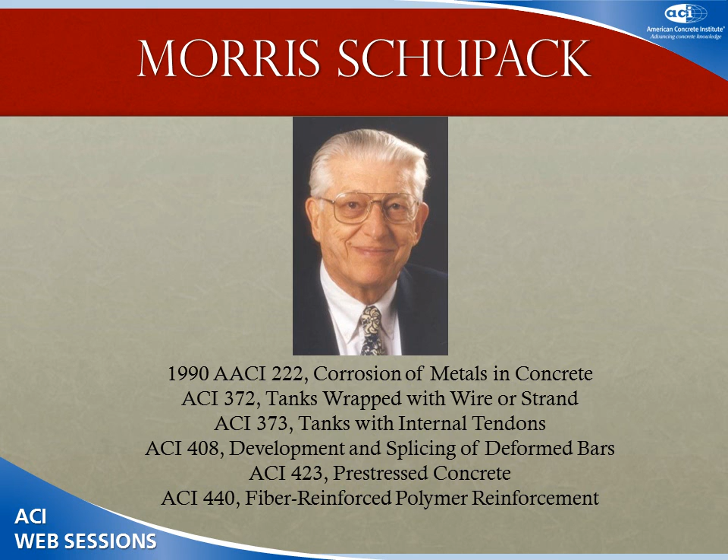Maury would only give me pictures of grout, and tanks and things. So I don't have any wonderful young pictures of Maury or family pictures of Maury, because when I asked for pictures, I kept getting more grout pictures. So I finally gave up.

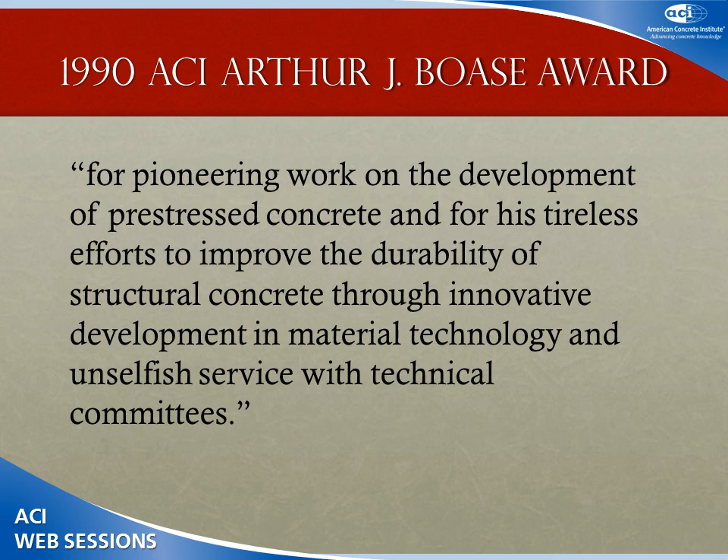Maury was also the 1990 recipient of the ACI Arthur J. Boase Award for his pioneering work on the development of prestressed concrete and tireless efforts to improve durability of structural concrete through innovative development in materials technology and unselfish service with technical committees. I would guess we're well into the thousands of hours that he's put into ACI with his contributions on the committees. Maury is not an academic. He is a consulting structural engineer and had a very interesting background.

At the age of 15, living in Brooklyn, he took a course in structural engineering at the Polytech, and he still says today that this was the best educational experience he ever had, was this course at 15. That combined all the theory and mechanics and structural design along with hands-on time in their steel fabrication lab. And then to test out his ingenuity, he went around the neighborhood and repaired all of the steel cellar doors for his neighbors using leftover bed frames and things like that, and then taking them to the fabrication lab to finish up. So a very ingenious engineer from the very beginning.

In 1939, he started college at Brooklyn Polytech and then moved to George Washington University in 1940. At that time, he was also working as a civilian draftsman for the Corps of Engineers. And in 1941, as a GI, he was selected for a year of civil engineering specialist training at The Ohio State University. After that year, he was sent to France as a construction specialist, and those quotes are his. He said, "I'm not sure what a construction specialist is, but they told me I was going to France with a 50-man detachment and would be constructing 3,000-bed hospital laundries."

This one he also said tongue-in-cheek that he was made staff sergeant. One day they called him in and said, "Due to your superior technical savvy, we are promoting you to staff sergeant." He says he wasn't sure what that superior technical savvy was, but he was happy to be promoted.

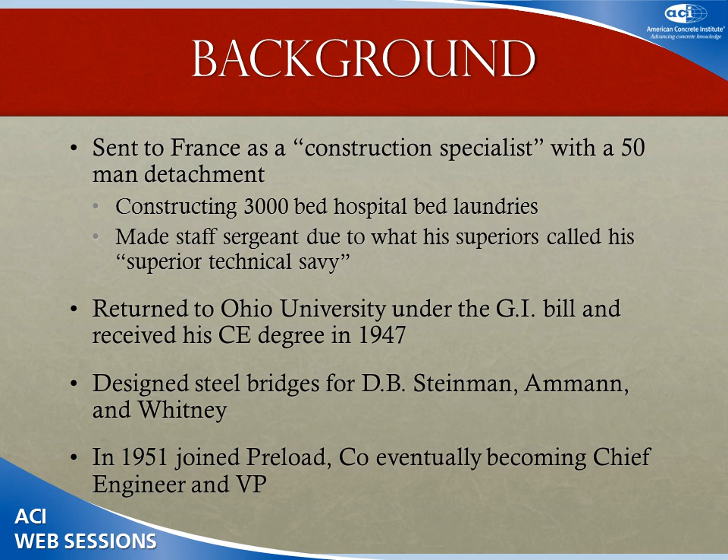And he sent me 2 huge boxes full of all the files of every patent that they were looking at in those days. And it was completely fascinating. It was like sitting in the library stacks going through some of the craziest things I've ever seen for potential post-tension anchorages, but also at the development of what we have today. And then the correspondence between the couple companies that were working in this area from the day. So it was a neat historical record, and he was really part of this whole development, particularly in the post-tension industry.

He started his own consulting practice in the late 50s and specialized in pre-stressed concrete structures, and since then, that's basically been his focus for different types of companies. He's investigated over 200 pre-stressed steel corrosion incidents is what he calls them, but typically problems, about half of which were the pre-stressed tanks, and about 40% was unbonded post-tensioning problems, with the other 10% being other things.

He's a past board member not only of the American Concrete Institute, but also of the Precast Pre-Stressed Concrete Institute and the Post-Tension Institute. ACI first, the PCI and PTI developed from there. So he's been active in all those. I know him very well also from the PTI committees. He's extremely active on the Grouting committee there, and with tanks, of course. He's got over 70 articles and numerous reports.

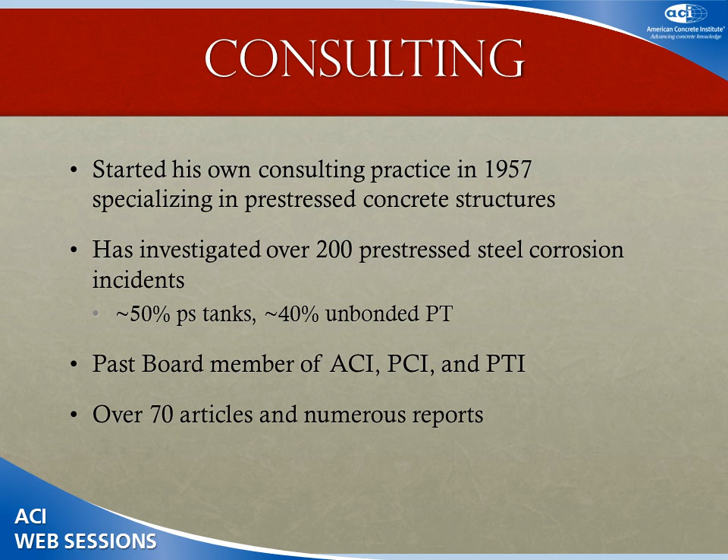I met him as a graduate student, and I'll have a story about that towards the end. But once I met Maury, he's got an article for anything you can imagine. If I needed something on some aspect of grout, he's got it in his files. It may have been published in something that I haven't heard of, but he's got it, and he's got all the details, and had already investigated a lot of the things that I thought were new.

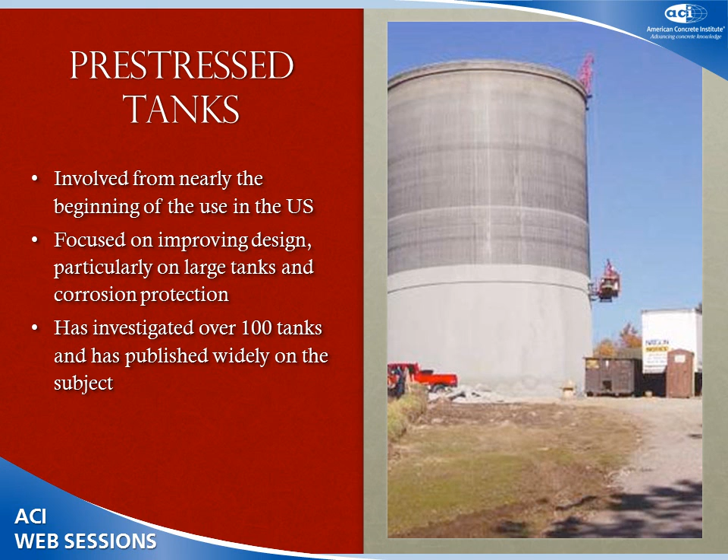So one of his areas is pre-stressed tanks, and this is another case where he was involved nearly from the beginning. So some of the early pre-stressing in the United States was the pre-stressed tanks. And his focus was on improving the designs, particularly with the very, very large tanks, and also looking at the corrosion protection, knowing the importance of that in this type of structure. He's investigated over 100 tanks and published very widely in this subject.

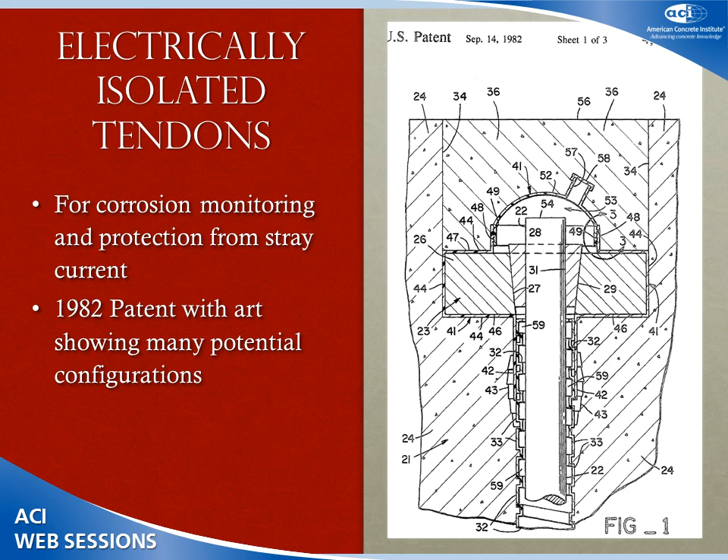He has quite a few patents, both in grouting and also there's some in tanks. If you look up his name in the patent office, there's quite a few in there. One of the ones he talks about is in the electrically isolated tendons for corrosion monitoring and protection from stray current. So this is a way to electrically isolate the whole anchorage and strand system. And this is his 1982 patent. And in that patent, if you look it up, there are many, many different configurations of this, most of which look very much like what you'd see today in an electrically isolated tendon.

Post-tensioning grout. This is the part I know most about Maury, as one of the other couple people who work in the post-tensioning grout area. He recognized the bleed problem that we still wrestle with in post-tensioning grout back in the early 60s. He was working with a lot of the taller nuclear structures at the time and started seeing the water collect and started studying what was actually going on there.

So I don't have my grout primer here, but essentially what you get in a post-tensioning tendon is a pressure head develops in the grout, and that squeezes water to the top. And if you have strand particularly, it filters the water and helps you collect a large bleed lens, which then can reabsorb or evaporate or stay there, but leaves that piece of strand or bar tendon vulnerable to corrosion and other problems. So the higher the pressure head and the more strand, the more you see this.

And if you look at these types of structures that he was looking at, 150 feet, 180 feet, these are huge, huge vertical rises that cause a lot of pressure and very large strand tendons in many cases. So he started doing these mock-ups in the 60s at full height. They would attach them to the outside of the tank with some clear duct and take a look at what happens, and found that there were feet and feet of water that were developing at different points along these tendons.

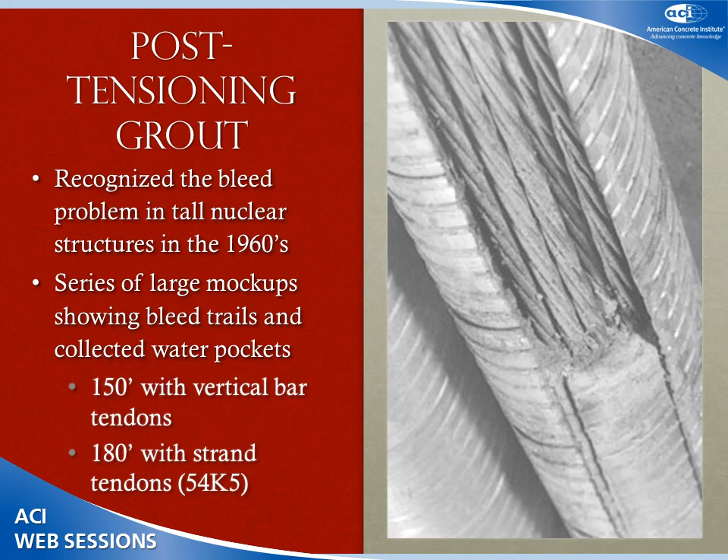So eventually we decided to name this test in honor of Maury, and so it became the Schupack test in the PTI specifications. It has since become recently an ASTM specification for pressure testing, filter pressure testing. It's a very interesting way of handling both the filtering and the pressure test, and my personal belief is to this day this is the best bench scale test we have for looking at this.

Okay, we have some other types of mock-ups and things to try to get the real scenario, but it's not easy to build those large mock-ups, especially if you're looking at a case of 180 feet with a 54-strand tendon. So I still think that this is a really effective test for trying to get a feel for if a grout has that type of bleed resistance.

He did this test in conjunction with trying to develop a grout that would withstand this type of pressure and filtering. And so during that time, he developed the first thixotropic or water-retentive grout admixture that stopped the bleeding in grouts. And this early admixture was very effective. And this would be hard to do with grouts today. It was a much thicker grout than what we see today, much more gel-like, but they still were able to pump it in hot conditions. And this grout could successfully pass that 180-foot high test with no bleed visible in a clear duct. That's not a small feat.

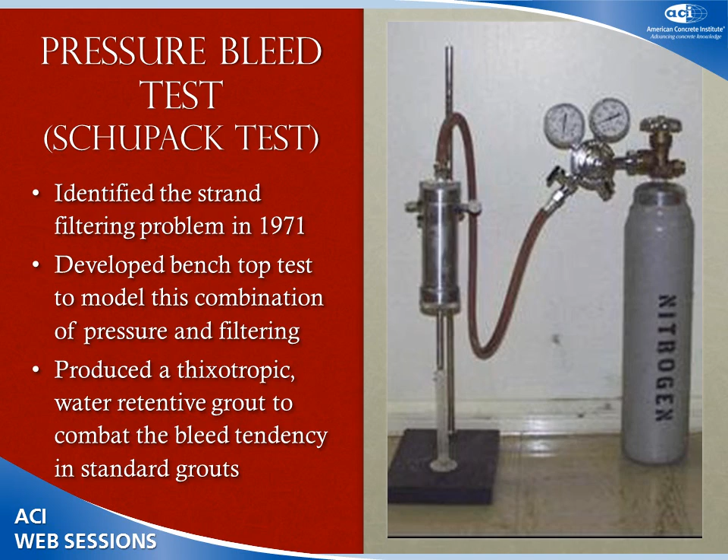This is what the test is. You fill up this little small 200 milliliter stainless steel funnel with grout, and you have pressurized air, and you push the water out of the grout. In the bottom is a small stainless steel screen and then a fiberglass filter that's supposed to mimic the filtering effects of the strands. Now, it's not the perfect scenario, but it's pretty darn good compared to a 180-foot tall tendon versus a very small benchtop setup, and is effectively used particularly to screen out the low-end grouts that are not going to be applicable for kind of 10-foot rises and below.

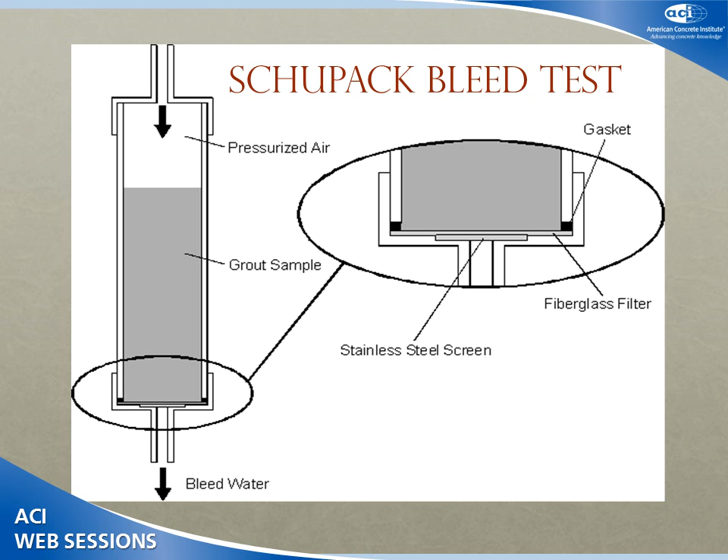I pulled this from a paper. He did a historical review. Well, not recently. In 2004, he had a paper in Concrete International, and he had sent this to me saying, oh, there's good pictures in here, but I kind of liked that he had his list of grouting myths. So these are Maury's grouting myths. Pressure and lock-off as a final step to eliminate voids. In other words, he doesn't think you need to do that. I happen to agree. It turned out that I agree with him on every one of these, I think, so I was excited about that.

Grout has to be visibly flowable to fill the duct. Grouts can't be pumped above 80 degrees Fahrenheit without ice. High-energy mixers alone will control bleed. The little beaker bleed test is informative. So, in other words, none of these are true, in his opinion.

Thixotropic grouts need a very high pressure to pump. Expansive grout is beneficial if you lock under pressure. Topping off vertical tendons after bleed occurs provides adequate corrosion protection. The ASTM flow cone test, which we still use by spec, is a meaningful test for pumpability. Grout strength is more important than filling ducts and spaces between pre-stressing steels.

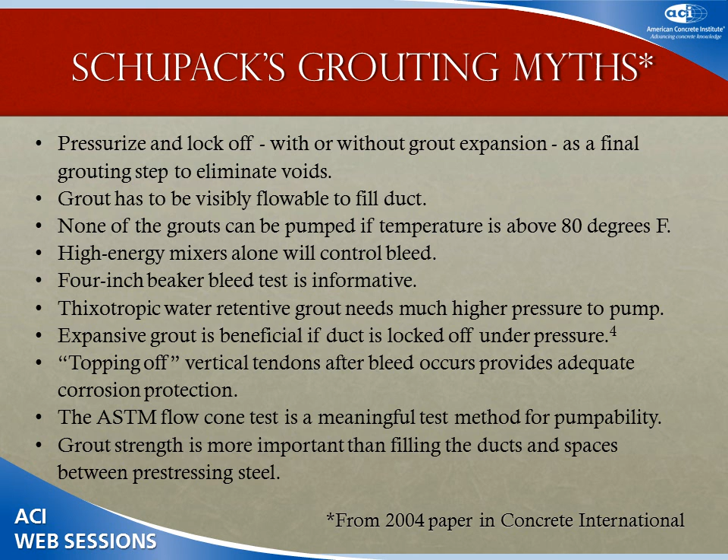So he believes all these are myths, and I agree with all of them from 2004. We still fight a lot of this stuff today, and I think that his knowledge in this area over the past 50-some years was right on the money. I really think that he thought of things way ahead of time.

And I'll tell you, as a graduate student, what I found when I went to my first conference at ACI and presented my grout research, I thought that no one had done that stuff, because it just wasn't a very exciting field, grout. Who does research on grout? Little did I know. But what I found out is over half the things that I did had been done 30, 40 years earlier by Maury.

So we became very good friends to talk about the different things that were going on in grout. And he was glad to see a revival of someone finally listening. I felt that from him for a long time because he went through a lot of this in the 1960s and the 70s. And the bridge industry, for instance, in the United States did not pay attention to this problem until the late 90s. So the fact that we were able to connect and use the experience that he'd done so many years ago, I think was vindicating for him and also very helpful for me because he shared freely what he'd done before and worked with me.

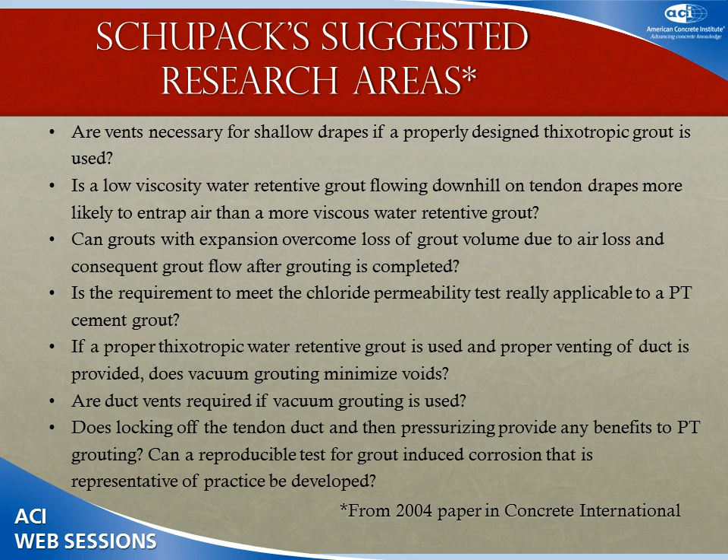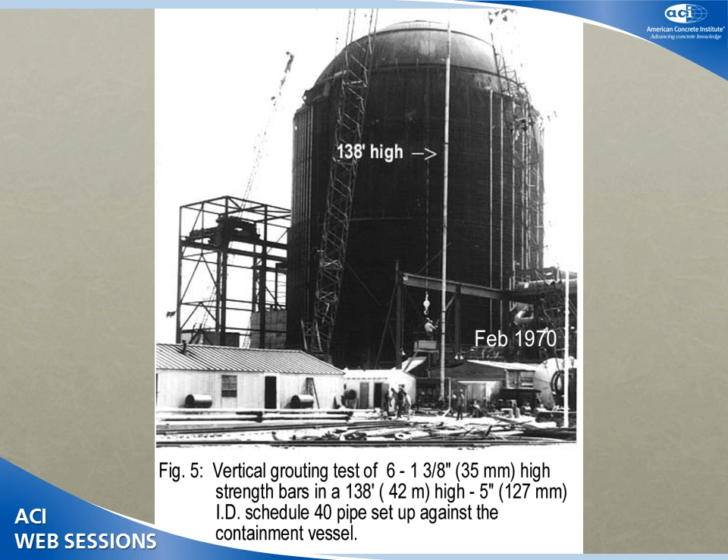Here's one of his, I pulled some figures from his test. This is 1970, 138-foot high tendon. The students in here who have done some of these in the lab can be very impressed with the scale of this. So they did full-on mock-ups of these things. Here's a 170-foot high one with the 54 half-inch diameter strands, Schedule 80 pipe. It says that they saw no bleed water voids from the exterior of this, and they chopped a lot of these up. I have slice pictures of that as well.

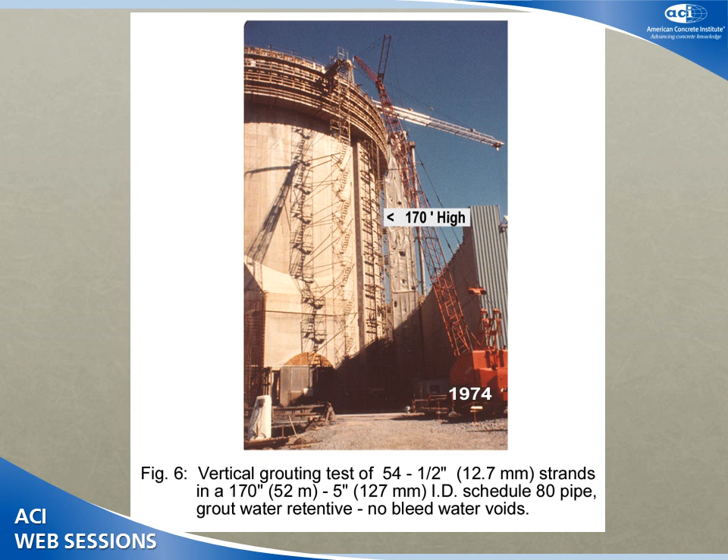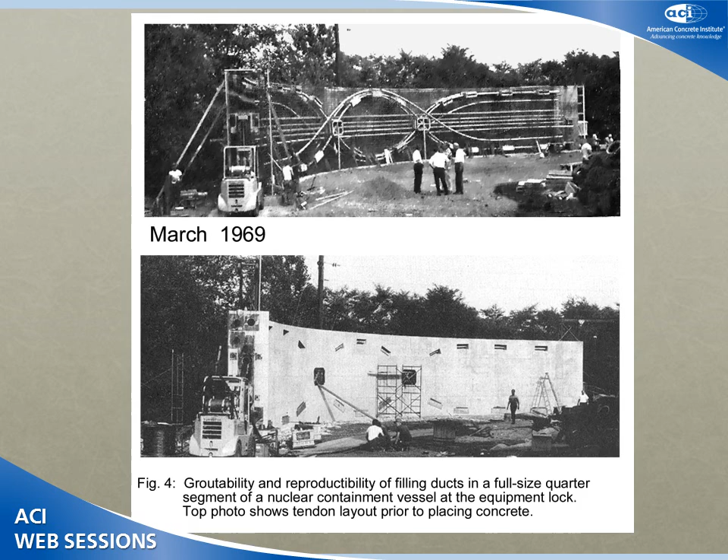And the specs now that talk about the Schupack test and some of the bleed parameters came from comparisons to these actual tests, and we have never repeated this height of test because of just the feasibility of doing it. My lab can't handle that sort of thing. Here's a really nice parabolic tendon drape. You can see the size in the pictures there. They did some work with very large tendon curved beams. Basically, he's looking very specifically at the tank type situation here.

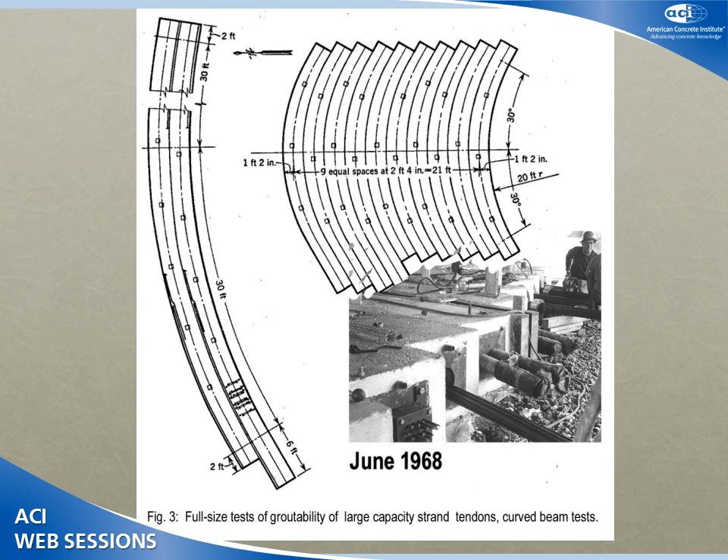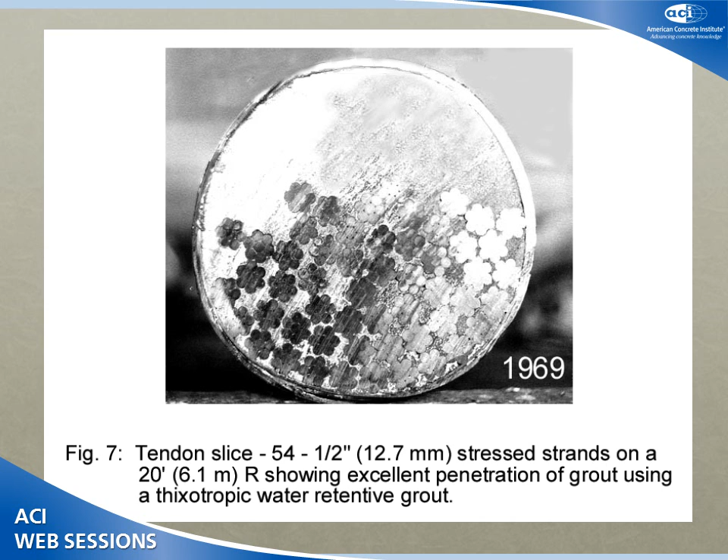Here's some of the voids. 1968, they're seeing all these voids between the wire and the strand. And then I like this picture because this is another what I think is a myth, that you can't get this thixotropic grout between the wires and between the strands when they're tensioned. And this is an absolutely perfect slice of tendon with completely filled grout from that same 54-strand test that they did back in 1969. And so I'll finish up by talking about how I met Morris Schupack.

It was at the Spring ACI Convention in 1998. I was still a graduate student at that time, and it was in Houston. I knew it was in Texas; I had to look up if it was in Houston or Dallas. And I'd gone to some other conventions, but I hadn't been to ACI before, and my professor, Jack Breen, paid for me to go. So I came along, and I had my paper on my research in progress about high-performance grouts, which I was pretty sure no one would care about. And that was probably fairly true, except there was a very important person in the audience that day.

This is me around that time, playing with grout out in Texas at UT. And I stood up and gave my talk and talked about the Gelman pressure test and naively had no idea that sitting in the audience was Schupack. And I went on. And that day was important because someone stood up in the audience and said, "So, how did you think that Gelman test worked? Do you think that thing's any good?" And I said, "Well, yeah, actually, I think it's a really good test."

Most important words in my career, because he said, "Well, I'm Morris Schupack, and I developed that test." And then he sat down, and I left that talk and talked to him later that day outside for hours. And he talked about the excitement of having someone working in the field again and getting on some of the committees, and helped me personally a lot. And I think he's helped our industry a great deal. And I'm really proud to have known him and to have sat on 222 with Maury and Brian. So I'll finish up. Thank you.